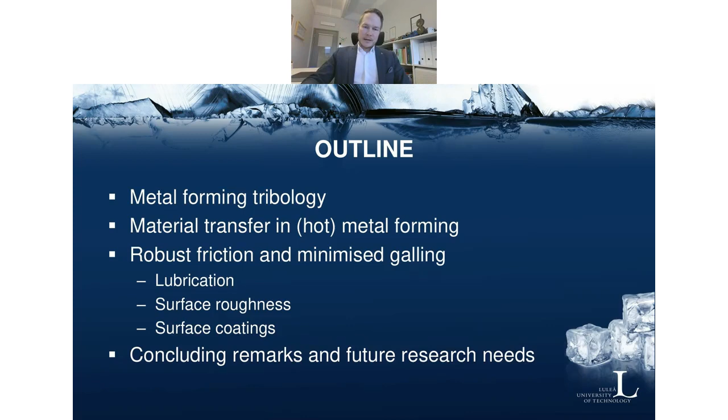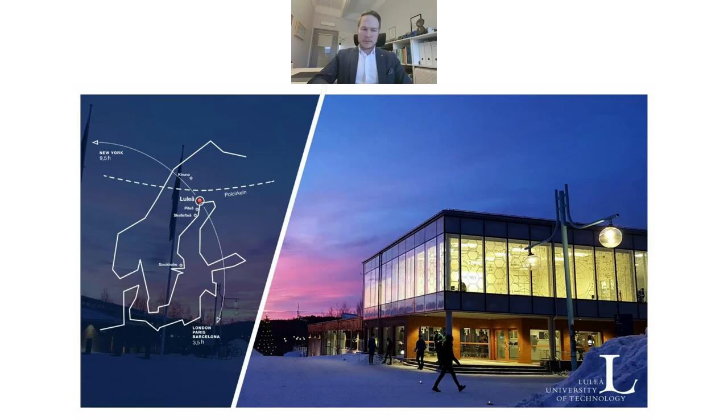Before we dive into the technical content, I just want to say a few words about our university. So I am located in the north of Sweden, in the city of Luleå, which is about 1,000 kilometers north of Stockholm, as you can see on the screen, highlighted in red there on the eastern coast of Sweden. Our university is a technical university with 4 campuses distributed in the north of Sweden, from Kiruna in the north to Skellefteå, some 130 kilometers south of where I am sitting in Luleå right now.

So just some short facts to put the university into a broader context. We are a research biased university, as you can see from the split in our budget allocation - we have about 60% nearly into research and a little 40% in education. We have a turnover of roughly 1.9 billion Swedish crowns, and in total, about 19,000 students, 1,800 employees, and out of those 1,800, we have about 270 professors.

We are collaborating with industry to a great extent, and 60% of our research is externally funded. So we have a very applied fundamental research profile in all our activities. In total, we have about 67 research subjects at the university, including the technical and philosophical faculties together.

Our division, called Machine Elements, is the tribology group at the university. It's chaired by Professor Roland Larsson, and the size of the group is in the range of 46, 47 people today, about 20 senior researchers and 26, 27 PhD students at the moment.

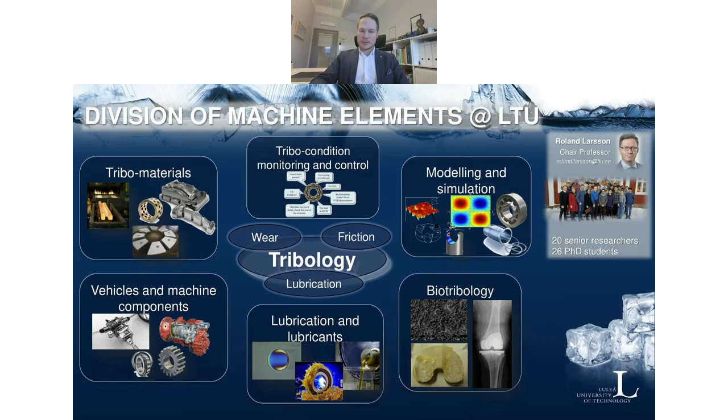Right, so over to the topic of today: metal forming. I'll start with metal stamping or sheet metal forming, just to put this into context and give a little bit of motivation why this is an important area.

If you look at global market growth of metal stamping, there is a prediction of about $3 billion growth in the period 2019 to 2023, this year today. The annual predicted growth rate going forward is about 3%, and 40% of the growth is in the APAC region. So it's by no means a technology and manufacturing process that is at an equilibrium stage today.

This is continuously growing, and the motivation is highlighted in four words: it is a cost-efficient way of serial production of complex shaped components. It is a fast production process, in the sense you can produce complex shapes and relatively large components, and also small components if need be, in a quick and rational way. You get very good tolerances typically, and it's also flexible in the sense that by changing tooling and processing conditions, you can obtain a wide range of geometries, sizes, and also materials in the products you're producing.

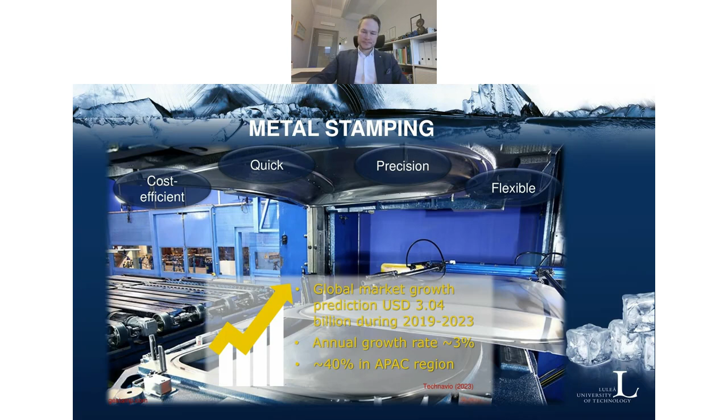If we focus a little more on hot sheet metal forming, which is a process we have been dealing with for a long time in our research group, this is today the single dominating technology for production of high strength steel automotive components.

And it's basically motivated by three aspects in the automotive industry: you want to reduce the weight of the vehicle, reduce the cost, but increase the performance. This balance needs to be met in different ways, and hot sheet metal forming does that for the body-in-white structure typically. So that will be the structural parts that make up the frame or body of the vehicle, as you can see in the top right image there.

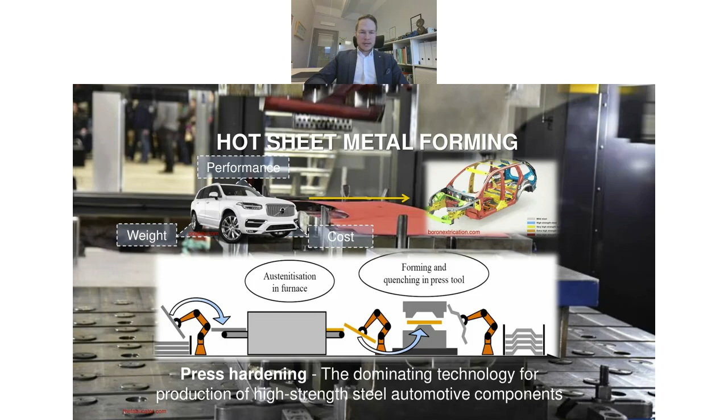So what you typically deal with are safety components, structural members, such as B pillars, A pillars, bumper systems, etc. The process itself involves a metal blank that goes into a furnace, you austenitize the material, quickly transfer it into a forming tool, form it in a hot stage, and then quench the material while the tools are closed. So you get good tolerances, complex shapes, and very good mechanical properties.

Another metalworking process I'll be addressing today is known as cold pilgering. This is a tube manufacturing process for producing high strength and high precision seamless tubes. The workpiece material, the tube, can be stainless steel, zirconium tubes, or other high performance alloys. The process itself involves a pair of rolls mounted vertically, as you can see in the image here.

There is an internal tool placed inside the tube called a mandrel, which has a tapered shape. The idea is that you reciprocate the rollers along the axial direction of the tube, and at the end of every stroke, you rotate the tube around its own axis to feed in an undeformed section of the tube. By that, you reduce the outer diameter and wall thickness and increase the length of the tube, while also improving the mechanical properties at the same time.

Important to notice here is that we have an internal and external lubrication system for this process. So there is lubricant inside the tube between the mandrel and the tube, and there is lubricant on the outside between the rolls and the tube.

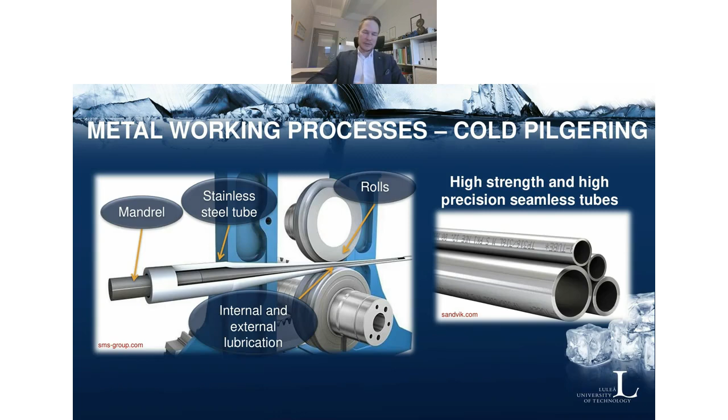When I look at metal forming tribology, I typically divide the main influencing parameters into these four categories.

So we have the workpiece material, obviously as one part in the tribo system, where mechanical properties, microstructure, and if there is a surface coating or surface state will obviously affect the friction and wear response.

Likewise, the counter material, the tooling, plays an equally important role, where typically the surface engineering that might have been applied, the surface topography, and any heat treatment that is done to the material will have a direct impact on the friction and wear response.

Then you have the lubricant, of course, in case the process is lubricated, where the type, amount, way of application, and how the lubricant distributes before and during the contact will have a significant impact on what friction level and the wear rates that you will see.

And then the process itself, whether that being a press or being a rolling mill or whatever it might be, that's where you decide your operating parameters, velocities, forces, temperatures, etc., etc.

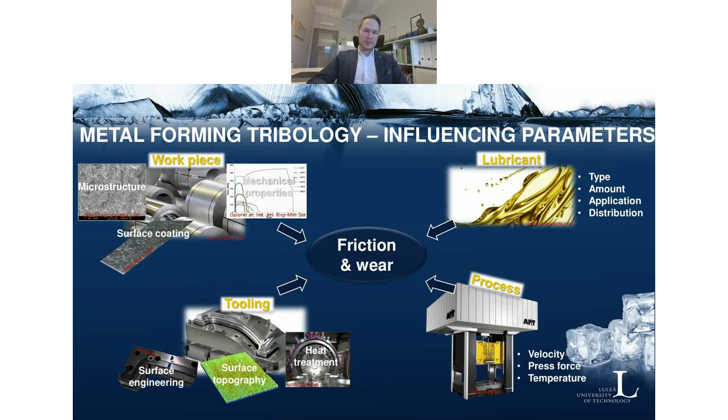So all these combined together needs to be addressed in some way to understand the response of the metal forming process from a tribology perspective.

So friction control is one thing, and it's important here to stress that it's not necessarily a friction reduction that is desired, or minimizing friction.

It's to optimize friction at a level that is robust and repeatable, and also at the correct level to obtain the right degree of deformation or performance of your forming process.

Minimizing galling, I will come back to that several times during this talk, but material transfer is a main concern in many processes, especially when we're dealing with high performance materials.

And this, of course, has a detrimental effect on, for example, surface quality of the component or tool life. So this is an important aspect that needs to be considered in many processes and from many aspects.

Lubrication, likewise, of course, type, amount, and so on and so forth is important. And process monitoring with a connection to tribology is also highly interesting, because the more you can measure and the more information you can extract from a process, the higher the chance of being able to detect deviations from the robust process window, and when it starts to deviate and create problems in terms of quality or performance.

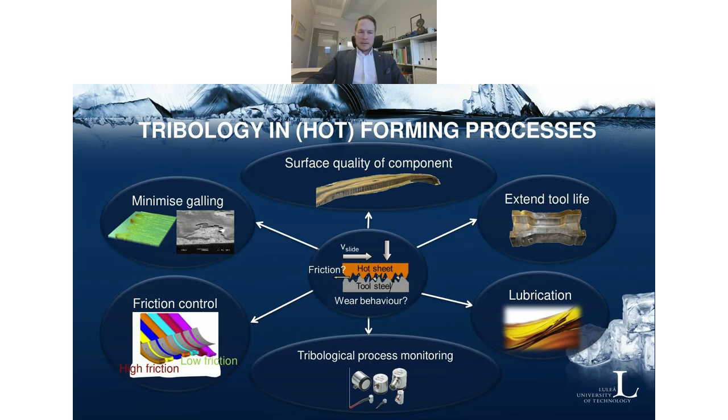Just to give you an example of what it looks like, I'm sure many of you are familiar with the appearance of a component and a tool that has suffered insufficient or improper lubrication. So this is an example of just a test geometry.

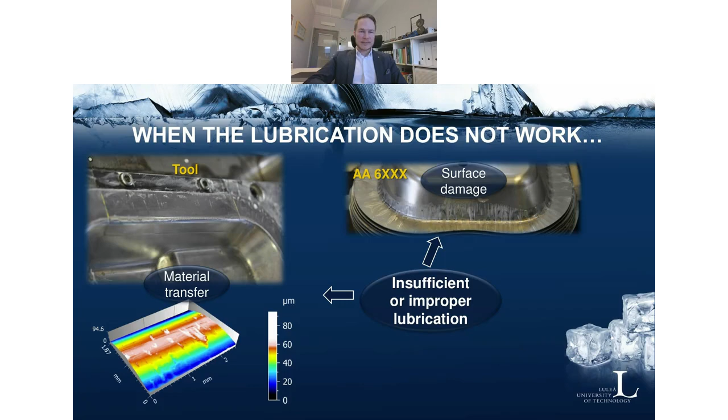So 5 components with insufficient lubrication. It's a very fast development when things go wrong, and it requires a lot of effort to reset the system to its intended state and performance.

A couple of words on hot forming and what needs to be considered, and I will give this example for an aluminium alloy, but it also applies to other workpiece materials.

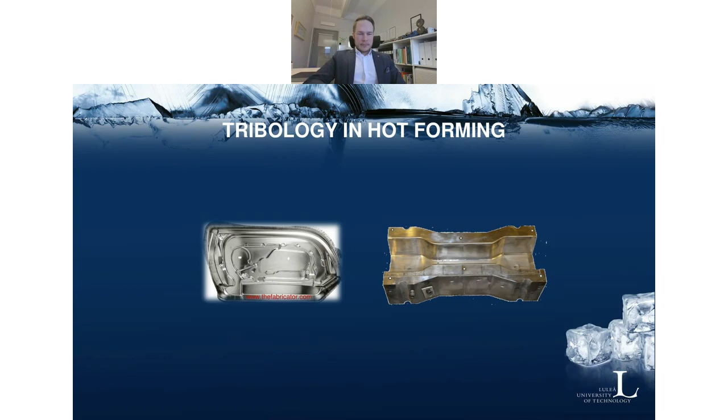And if we're forming the material at, let's say, 400 or 450 degrees, there is not much of the yield strength left in the material at that state.

That's, of course, one of the advantages, to enable forming of complex geometries. But at the same time, that also makes the material very soft and very susceptible to transferring to another surface, the tool in this case.

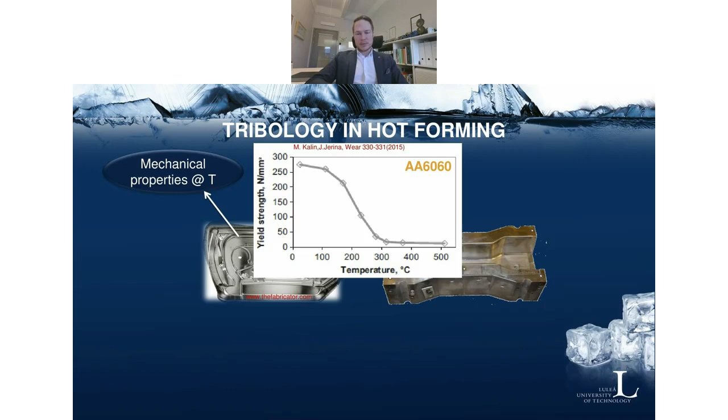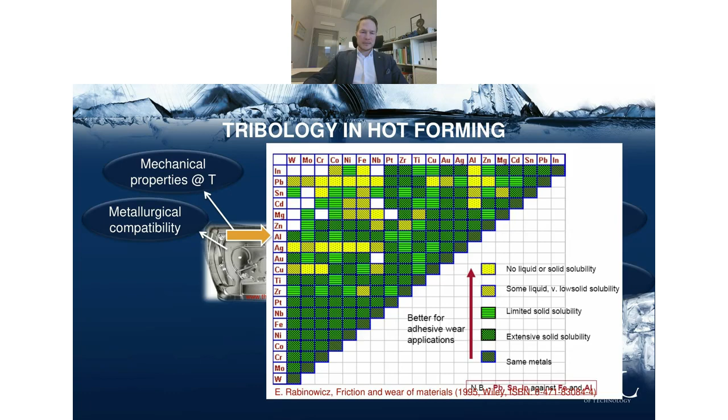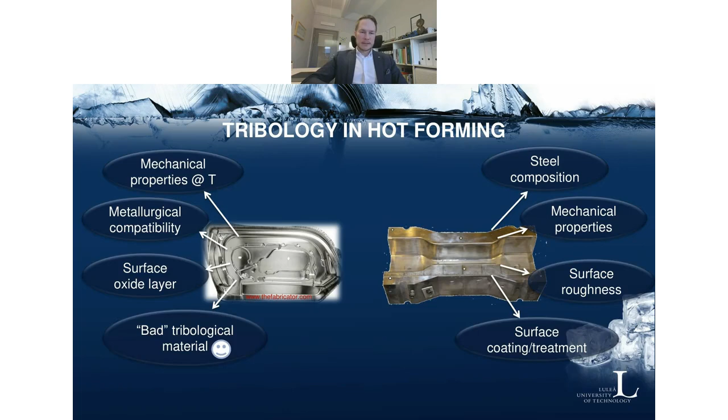Then you have other aspects like surface oxide layers, and in some cases a bad tribological material as the workpiece, aluminium being one example, among others. That creates a lot of problems when it slides against something else. On the tooling side, you have likewise the composition of the material, the mechanical properties, roughness, and if you do anything with the surface, such as apply a coating or a surface treatment like nitriding or something similar. These are the parameters, besides the operating conditions, that you need to address, understand, and control to be able to predict the behavior of your system.

So the trick is, of course, to extend the time that you can keep the tools in operation, because in some cases you cannot avoid transfer, but you can delay its occurrence, or at least minimize it. The idea is to extend the useful time the tool is deployed in production and minimize the time you need to spend on refurbishing or cleaning.

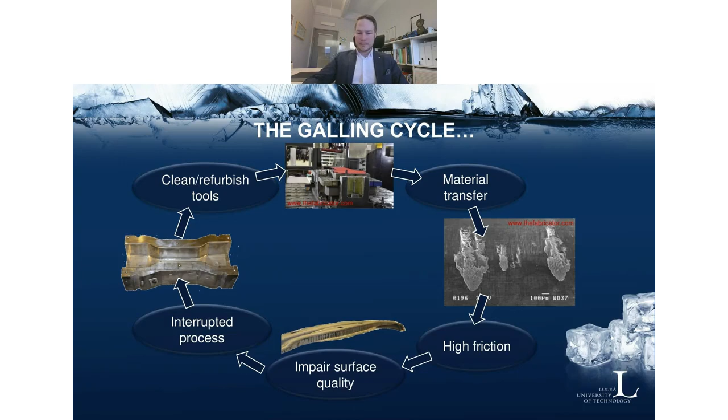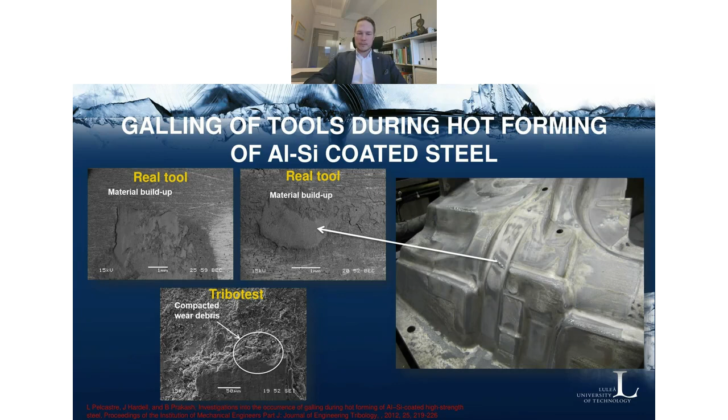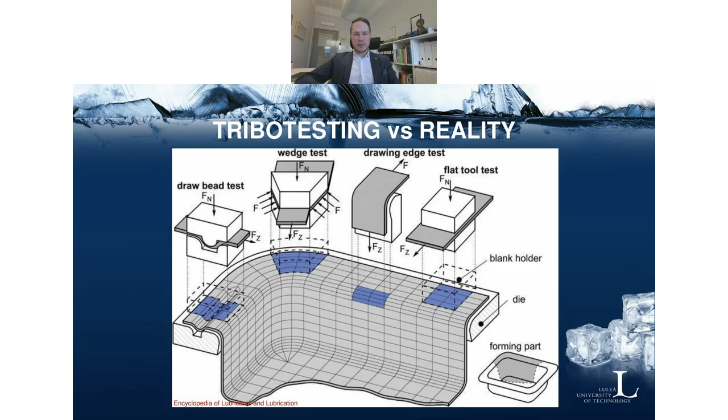Just a short note on tribo testing versus reality. If you have your global sheet metal forming process as the lower one, you can see the small cutout where you have different contact conditions depending on where on the part you're looking. You have draw edge tests, flat die or strip drawing tests, wedge testing, draw beads, and many other setups that you can utilize to simulate and obtain information from various parts of your forming process. All of this, of course, requires an understanding of the process and identification of the region where the problem actually occurs, and then addressing it with a proper tribo test.

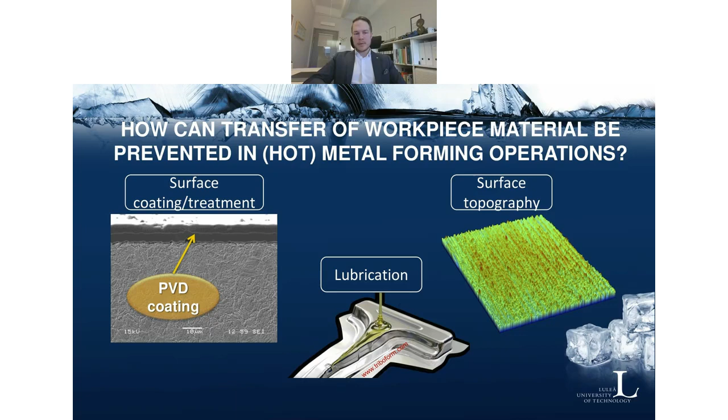So moving on now to a couple of examples on how to address material transfer in metal forming operations. There are typically three strategies as we are aware of. There is the surface topography aspect on both interacting surfaces. There is the surface engineering route, where you typically change the surface of your tool, but you can also surface engineer your workpiece. And there's lubrication. I'll give you a couple of examples on what you can achieve by changing these different parameters and how that may give you a certain response in your system.

I'll start with the tube forming process, or the cold pilgering process that I mentioned a couple of slides back. We tried to simulate this by using our reciprocating Optimol SRV tribometer. We tried different configurations: a stainless steel cylinder on a mandrel steel disc, basically taking the real materials and making them into test specimens, and also just a stainless steel ball on a mandrel steel disc. We ran different temperatures to see the effect of temperature, and the other conditions were kept constant during the screening tests.

The aim of the study was to investigate alternative lubricant formulations to replace chlorinated paraffin oils, which are typically not good from an environmental or human health perspective.

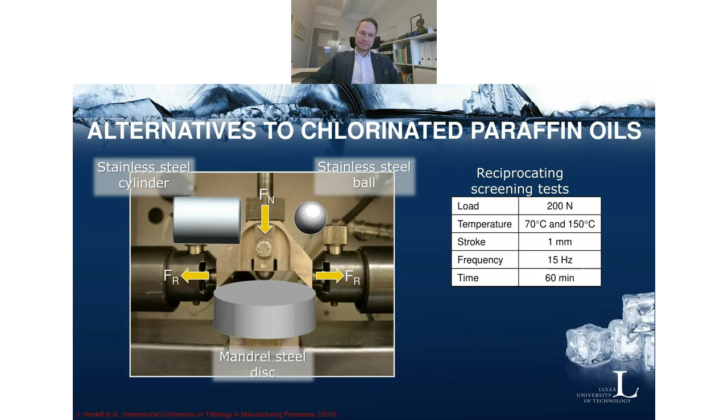Just as an example, the chlorinated paraffins work really well with stainless steel surfaces. So we have three different formulations called L1 to L3, and this is during a load ramp test on the left side. You can see that we have not extremely low friction, but at least it is repeatable and stable.

We also had a couple of sulfur-based chemistries that we evaluated as replacements for this. As you can see, the lubricant chemistry plays a very significant role in terms of its frictional stability on the system. Some showed relatively high friction, some showed unstable friction, but there were actually some—the blue one in this case, L4—that showed promising behavior with even lower friction at higher loads compared to the chlorinated paraffin chemistries.

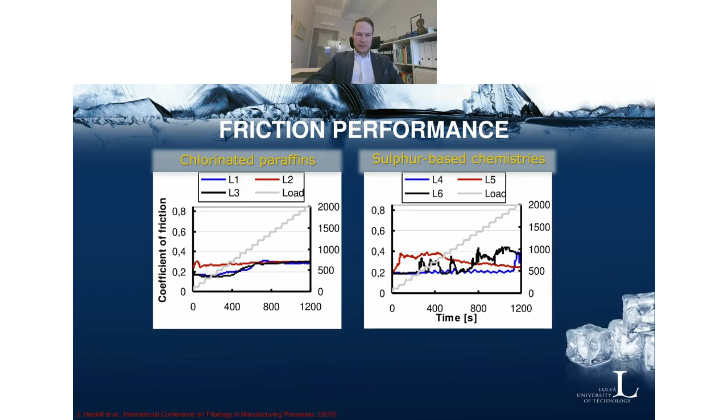In terms of specific wear rates, this is now the ball sample versus the disc sample. The bars in white are the stainless steel ball, and the gray bars are the discs. Obviously the ball wears more than the disc, not very surprisingly. What you can notice is a very low wear rate of both interacting surfaces when you use the chlorinated paraffins, and that is the whole point of using those kinds of lubricants. The sulfur-based chemistries did not really perform that well, except for one, L6, that gave very low wear on both samples.

So there is a good possibility to screen these lubricant chemistries when you design an experiment utilizing the real samples and real surface topographies that you are interested in studying. We also correlated these values to real production tests in the rolling mills, and found a ranking that was very similar between actual performance in reality and tribotest performance.

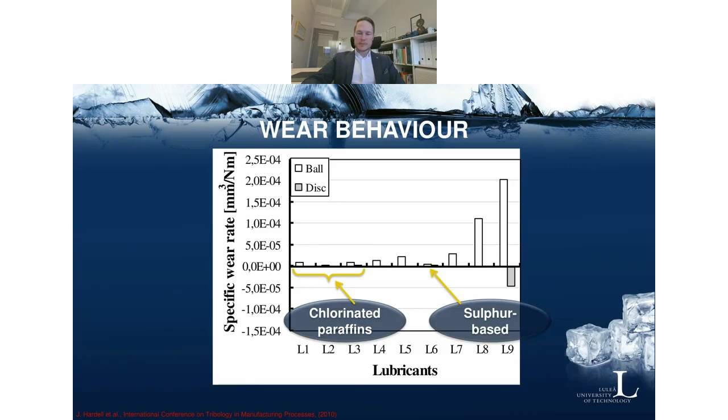If we move on to hot sheet metal forming and lubrication for that process—this process is typically performed in dry conditions. Traditionally, the industry has not been using any lubrication in this process. Basically you have your hot sheet that goes into the tools and you form it under hot and dry conditions.

We set out to investigate whether lubrication can provide some alleviation to this material transfer problem. We investigated three lubricants: one fully formulated potassium salt-based lubricant, which consists of an inorganic part and an organic part. The supplier split that into the two individual components so that we could try to understand which one plays a bigger role, or if that was the case at all.

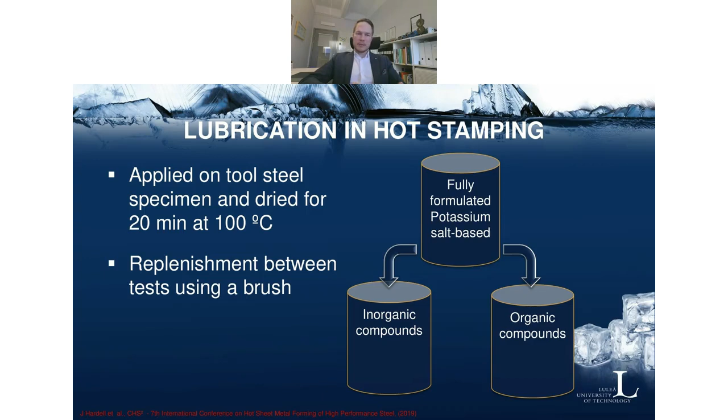We apply the lubricant in this case on the tool, as it would be in reality. We dry it at 100 degrees in an oven, and then we also replenish the lubricant. So we start with a dried layer of lubricant, and then we replenish with a brush between every experiment. For this purpose, we used a hot strip drawing test that we have in our laboratory.

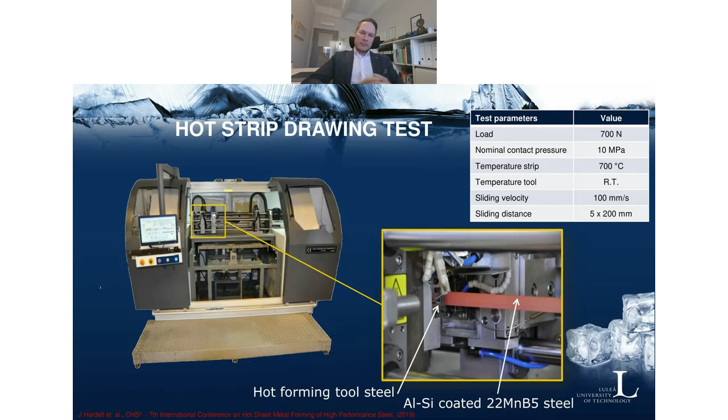This is the test configuration. It consists of a strip - this is an aluminum silicon coated boron steel, where the aluminum silicon coating is the problem, that's the one that transfers to the tools. This is pinched between 2 tool steel pins that we load against the strip, and then they slide in the horizontal direction along the strip for 200 millimeters in this case. The tools are not heated in this case, only the strip is heated.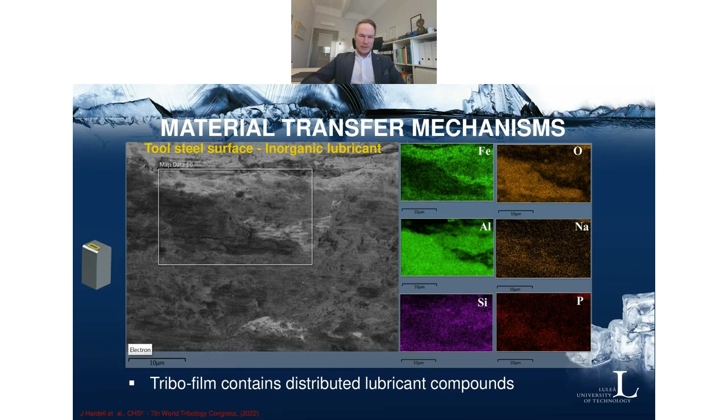And when comparing the appearance of this tribofilm, it looks quite different compared to the dry test - it's more granular, not as strongly adhered to the surface. So there is an added value in terms of the ease of removing the transfer material later on by utilizing a lubricant. It has to be looked upon from different angles if you are trying to decide whether or not to go for a lubrication strategy in this hot forming process.

Lastly, I want to show you what can happen when you combine several of these strategies. In this case, we're back again to the reciprocating pin on plate configuration in the Optimol SRV tester. We have a pin that is tool steel with an applied chromium nitride coating, a flat aluminum sample, and different surface topographies on the pin, and a lubricant between them also. This is again a heated test, so we run it at different elevated temperatures, around 300 to let's say 500 maximum.

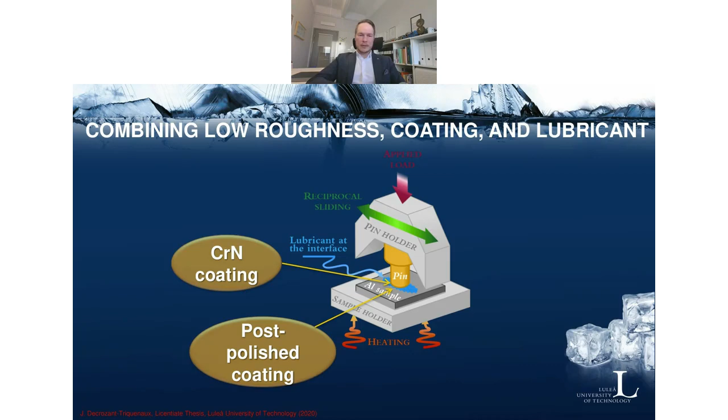I'll only give you a couple of examples here. The idea is to understand what surface topography, coating, and lubricant do together when you apply all of them. This is a little bit of a busy slide, but I'll try to walk you through it. On the left side, you can see the average coefficient of friction on top, where in dark gray you have the dry test, and in light gray you have the polymer lubricant. So dark is dry, light gray is lubricated. The AR means as received, and PP means post-polished.

What you can notice here is that as-received surface topography and dry gives very high friction. You have a coefficient of friction of nearly 2.5. It's very, very strong adhesion and transfer, basically aluminium on aluminium after a short while.

Just applying lubricant drops the friction down to about 0.5 or so, which is very good. But post-polishing, removing defects on the chromium nitride coating and retaining the lubricant, can reduce friction even more, like 3 times lower friction with post-polishing and lubricant.

The lower curve shows the Sa value of the surface for the chromium nitride. You have about 0.3 for the as-received, and basically 0.03 or so for the post-polished.

When looking at the surfaces, it's quite clear that when you have post-polishing and lubricant, you basically have no trace of aluminium on the chromium nitride coating. Literally no transfer at all. The lubricant works well, and there is no mechanical pickup.

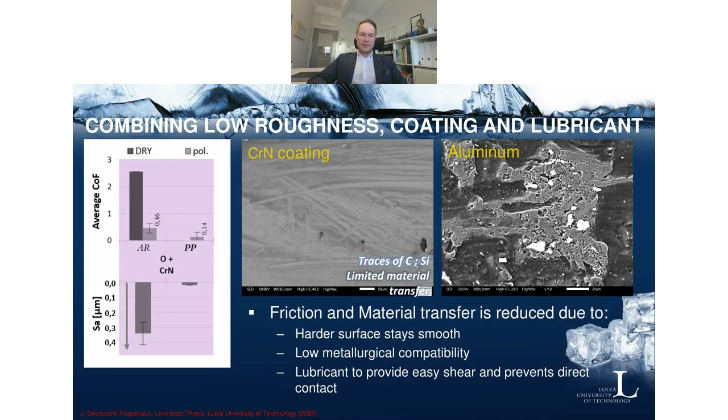There is an interaction of the lubricant with the aluminium also, forming a tribo-layer on the aluminium, which is interesting in itself, and cleanability comes into the picture when that happens. That's a separate study we are also working on. Basically the explanation is: if you have a hard surface that stays smooth, you have low metallurgical compatibility, and the lubricant that remains in the contact prevents direct contact, so you can obtain low friction and minimize transfer.

Some concluding remarks from this talk: first of all, friction and wear are critical for an efficient and robust metal forming operation. One of the main challenges in many metal forming operations is the occurrence of galling or material transfer.

To control this detrimental mechanism, you can of course use lubrication, but I also want to throw in the combination with surface engineering - coatings, treatments, topography - and optimizing that parameter space allows you to find a set of conditions that will minimize galling as much as possible.

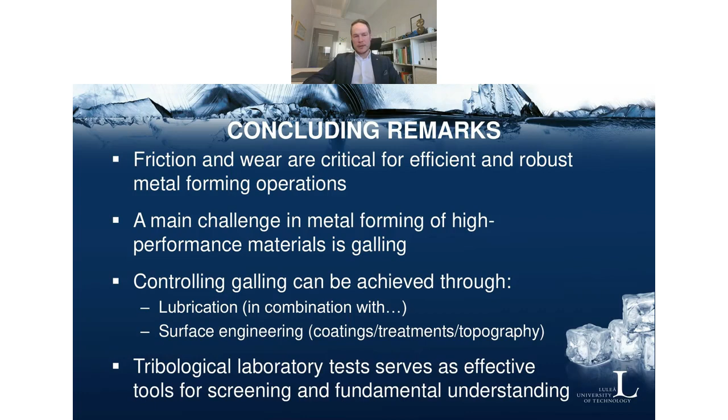Also a note on tribo testing: laboratory tests in various tribological configurations are very effective tools if you want to screen different configurations, setups, or lubricants, as well as providing the fundamental understanding required to predict and optimize the system.

Lastly, I have just a few words on where I see the future needs for research at present. Tool surface topography has been dealt with for a long time, but there is still work to be done, in my opinion, on aspects such as lay of the topography, texturing, and also the good enough level.

You can always polish and polish and polish and get the smoothest surface possible, but is someone going to pay for that in the end, and will it create an economically viable process? Maybe not. So a good enough level is important to find for many processes.

Likewise with coatings, there's an endless possibility when it comes to compositions, but also thickness, deposition techniques, etc. are variables that can be used to optimize and select various types of surface coatings that can be a tool in the pursuit of a robust forming process.

And when it comes to lubricants, the wettability of the surface, or wetting - how the lubricant wets the surface, how you provide easy shear - what is the mechanism? Is it a chemical reaction? Is it a solid lubricant or something else?

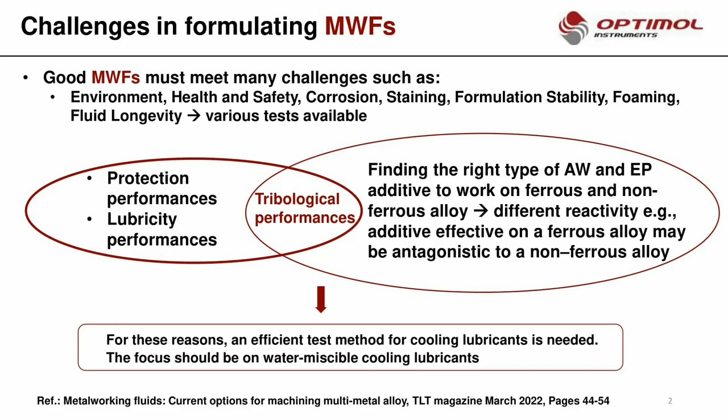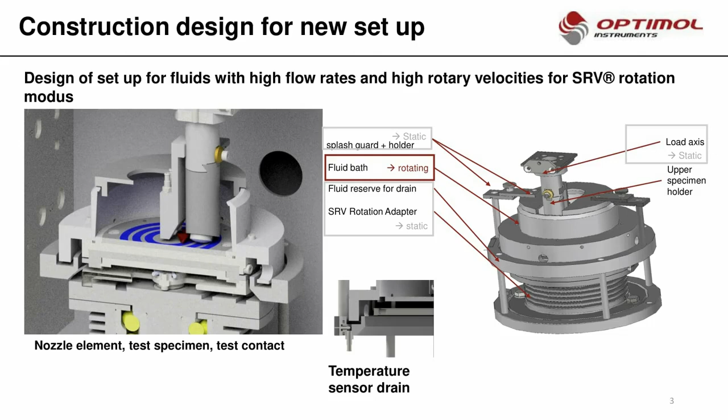Here you can see, very shortly, a cross-section of the design of this new setup for the rotation modus - this is the rotation modus of the SRV. The metalworking fluid or coolant is supplied directly to the test contact. We also managed to have a very good temperature sensor on the drain to control the temperature differences, and here you can see what the machine looks like.

It's very user-friendly. This is a disk, the under-specimen. You can run 6 tests on one piece, and you can also change the contact from point to line contact if you want - it's mushroom shaped - and on the bulk side we can have different combinations of geometry.

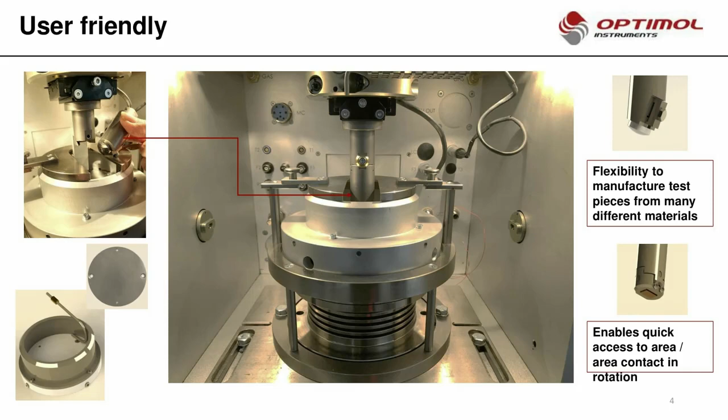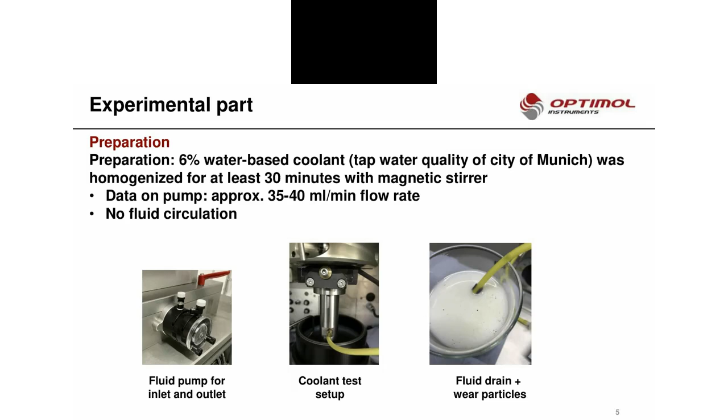Here you can see how the preparation of the metalworking fluid was done in the laboratory by us. Just to mention shortly, there is no circulation - otherwise you would see wear particles. If you run circulation, you get wear particles in your contact. It is one drain, and 6% of the metalworking fluids were prepared. We won't go into too much detail here.

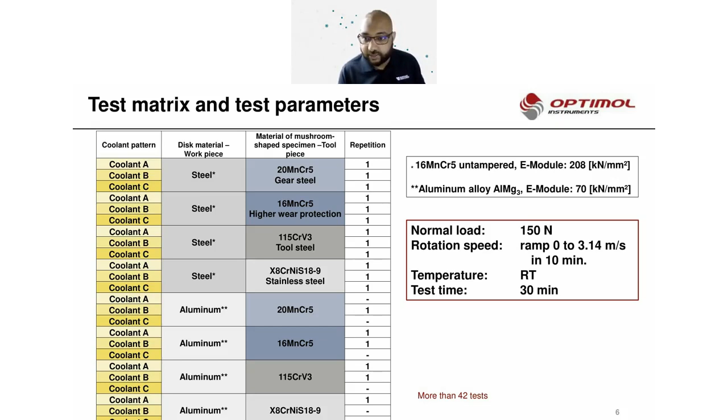For that, I'm not sure what's happening. Hopefully Dr. Schneider will be able to join us again. Okay, sorry, I am here again. Sorry, oh perfect, sorry, thank you. I'm sorry, I was too fast.

Sorry for that. Here you can see the test matrix we have run. There is a lot of possibility for the under-specimen and upper and under specimen combinations. We have steel and aluminum - we chose steel and aluminum as the workpiece, and we had 4 different steel materials for the tool piece.

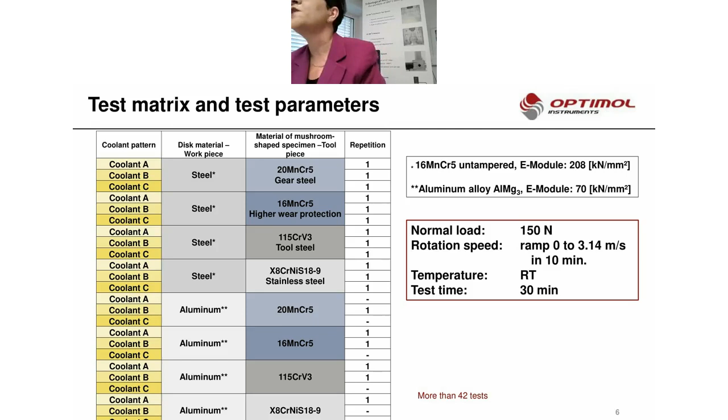Of course, I won't go into the details of the parameters. We have searched and found the perfect parameters for investigating this.

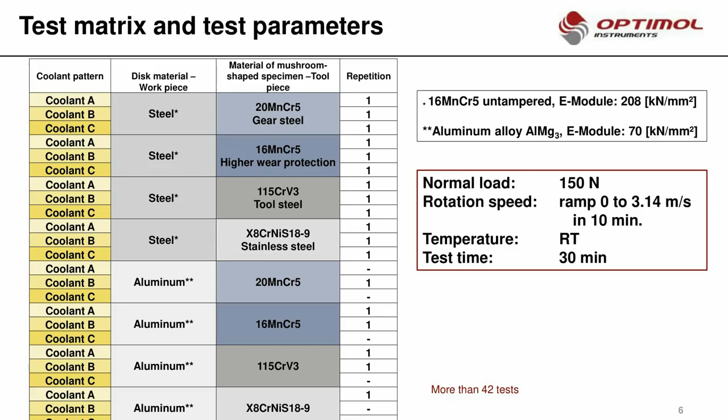For example, let me show you a few examples about the repeatability of this test method and the ranking of the fluids. As you can see, the repeatability is very good concerning the coefficient of friction we measured for coolant C, with the material being steel and 16MnCr5. The wear volume could also be measured online, and we found the online measurement correlated very nicely with the measurement under the microscope afterwards.

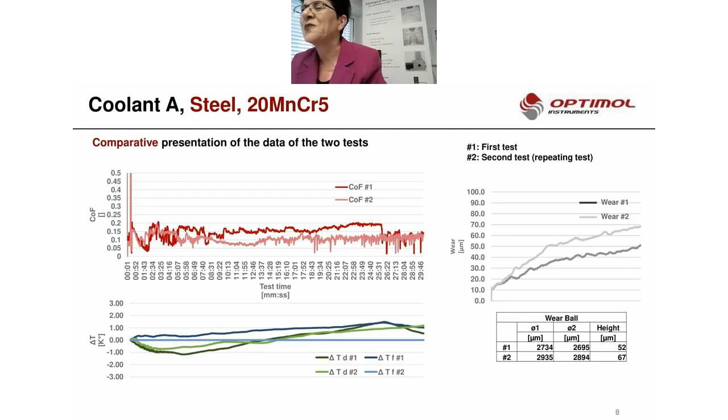The temperature development - we don't concentrate much on that because it was only a 1 to 2 degree Celsius difference, which is expected. We had a very high, about 49%, water content, and the coolant effect was well achieved.

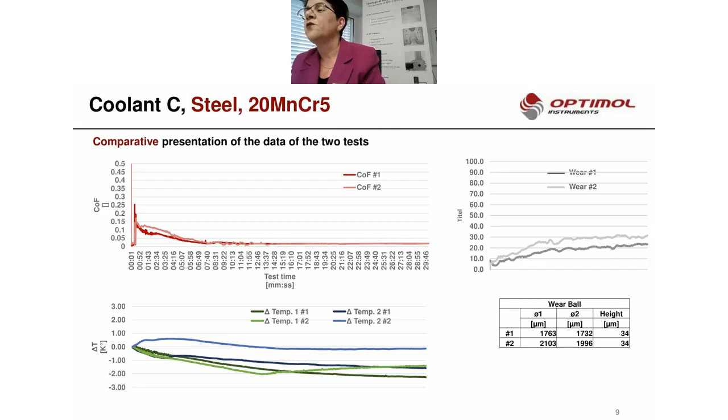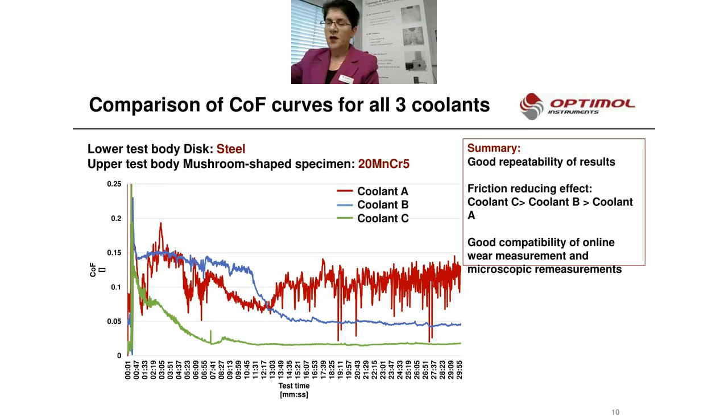You can see for the other example that the repeatability is really given, with very nice values for the wear measurement online as well. I won't show all 42 examples - I've chosen a few of them to go forward given the short time I have. You can see coolants A, B, and C and how we could rank them very nicely. Coolant C is absolutely the best one here, in combination of steel and 20MnCr5.

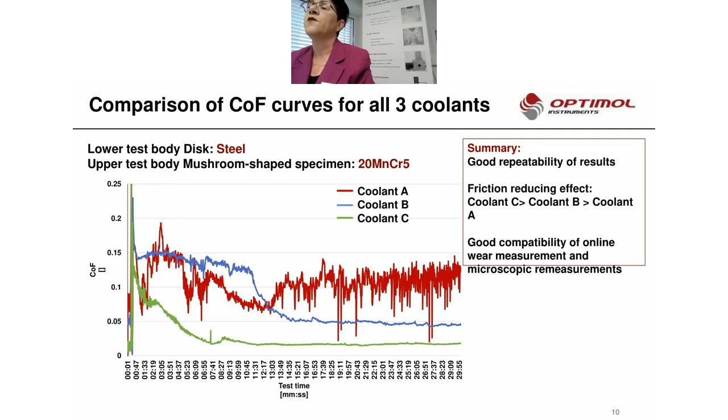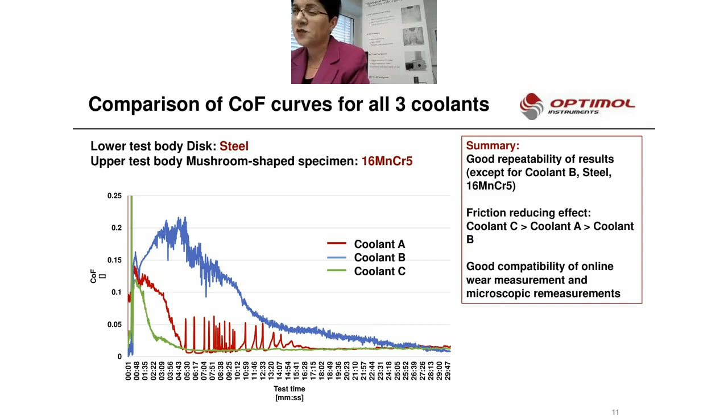And then the other example is for steel and 16 mangan chrome 5. Again, the coolant C is very constant, as you see here. The coolant B is not so good, and coolant A even has a low coefficient of friction value, but the fluctuation and the stability of the film is not as good as coolant C.

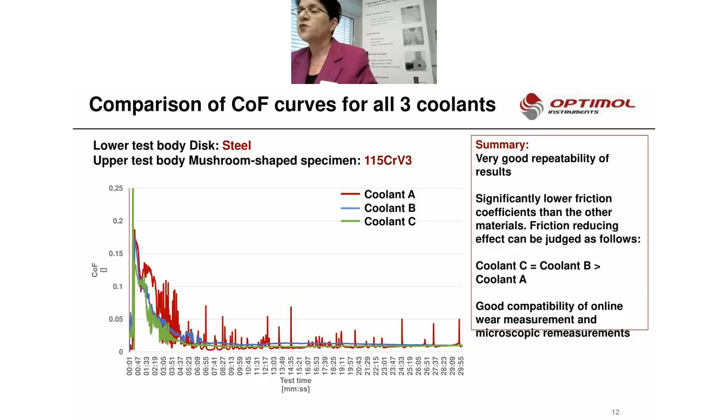And as we calculate again to see the repeatability, you can see the values, how the repeatability is really given with this method. Only in one case did we have one outlier, and the operator should make this test a third time. You see that in all combinations, the coolant C has the lowest value of coefficient of friction, followed by the wear values.

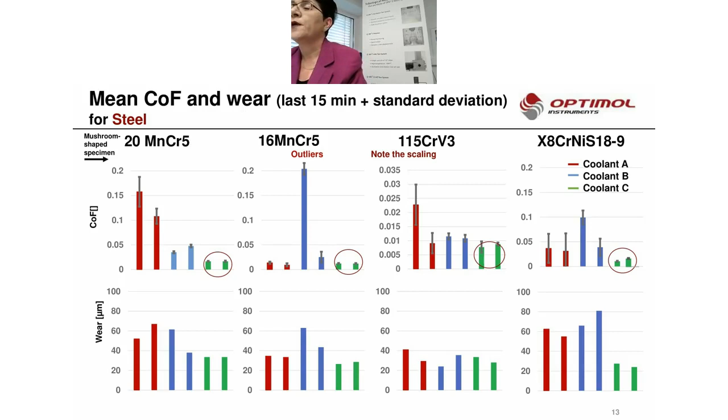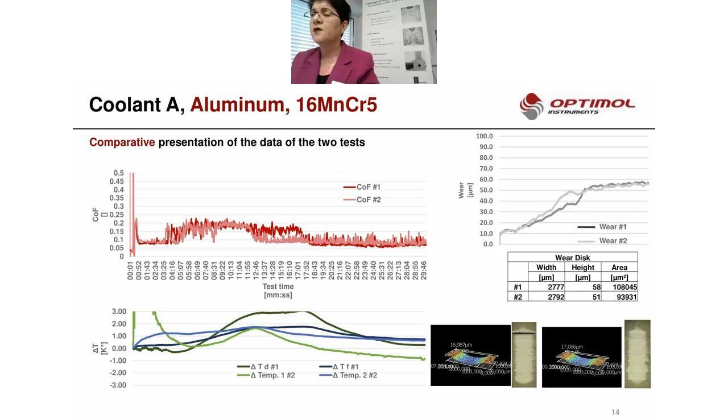And change now from the steel to aluminum, which is very important and interesting. We have seen that repeatability is absolutely given also with this combination, and the wear values are a little bit higher than in the case of steel. But we could not make that kind of nice ranking between A, B, C coolant, and we made a look in the first.

We made a ramp from 0 to 3.15 meters per second, the velocity which we have done also for the steel. And we have seen in the case of aluminum, we were too fast. We had to repeat all the tests under 1 meter per second.

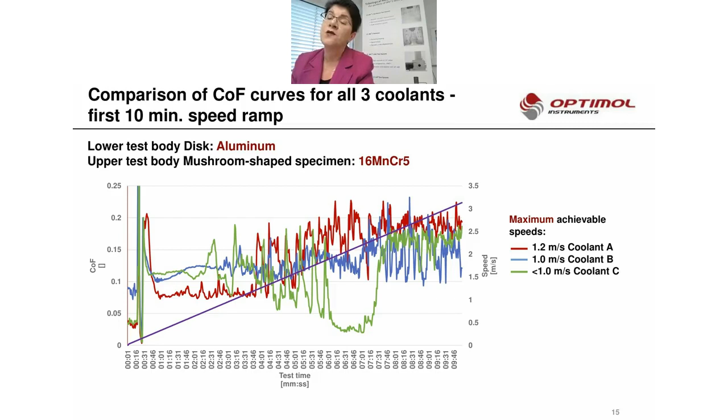And we have done it recently, and we could see that in this case, even though we have reduced also the normal load, we can have a good differentiation between and could make a ranking also for aluminum as working material. And you can see that maybe coolant B would be better for aluminum.

And of course, the operator or user can say this differentiation is not enough for me. You can change easily your parameters - that is what you can really do very nicely with the SRV. You go to higher load, you change the temperature, or in this case, not the temperature, you change the velocity, and you can have differentiation.

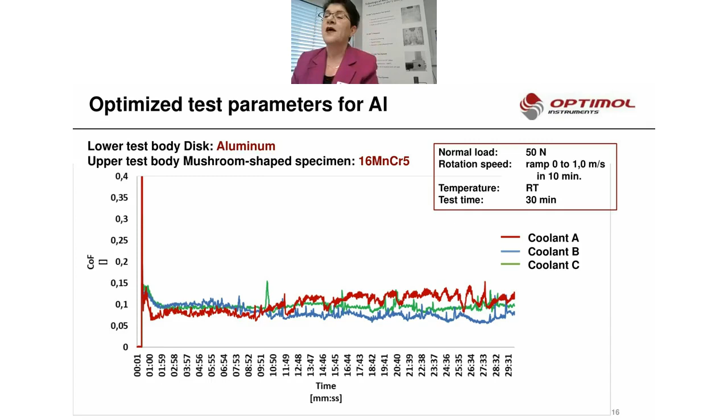And that is the summary of this short work. We have long work, but short presentation, so that you can see that this new setup can help you to rank your metalworking fluid or coolant in different applications, and very near to application with different materials as working tool and workpiece, and tool work material. And you have seen that the repeatability was very nice, as we are used to by SRV.

And of course, for the aluminum, a few more works must be done going forward in the future - you have to optimize the parameters. And we hope that this tool will help the metalworking fluid people, producers, to achieve to make better and better metalworking fluid or coolant for the future.